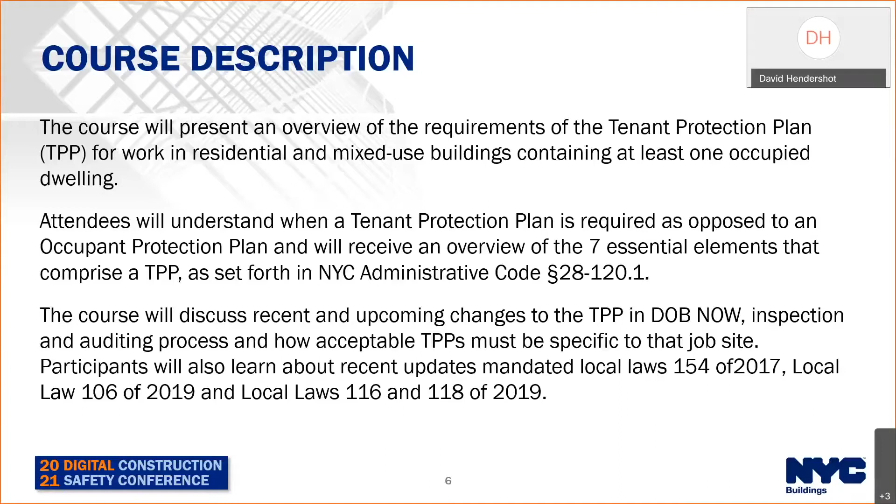28-120.1. The course will discuss recent and upcoming changes to the TPP in DOB Now, which is the online DOB filing system, inspections and auditing process, and how acceptable TPPs must be specific to that job site. You'll also learn about recent updates mandated under Local Law 154 of 2017, Local Law 106 of 2019, and Local Laws 116 and 118 of 2019.

The objectives of the course: you'll be able to explain what a tenant protection plan is required and when it's required, as opposed to an occupant protection plan. You'll be able to review the 7 essential elements that comprise a TPP and describe the level of detail and site specificity that's required for an acceptable TPP.

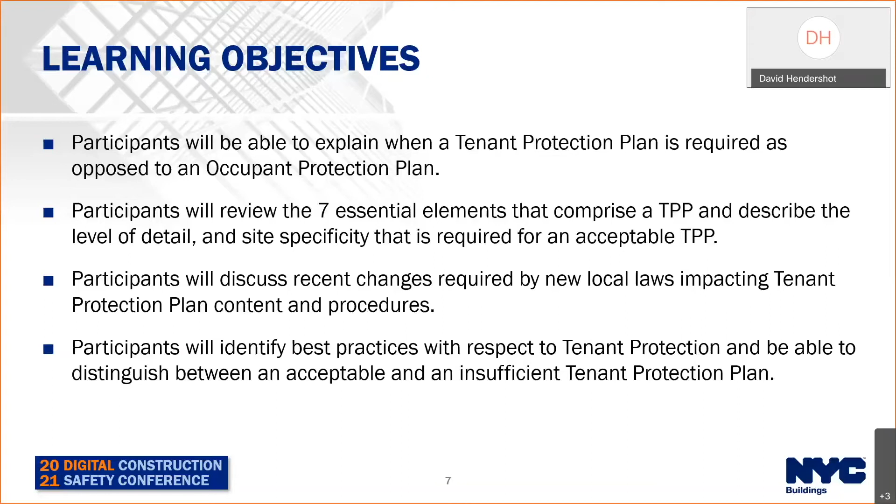Participants will discuss recent changes required by new local laws impacting tenant protection plan content and procedures, and you'll be able to identify best practices with respect to tenant protection and be able to distinguish between an acceptable and an insufficient tenant protection plan. I believe that brings us to Sarah's portion, so I'll sign off and we can pass over to her.

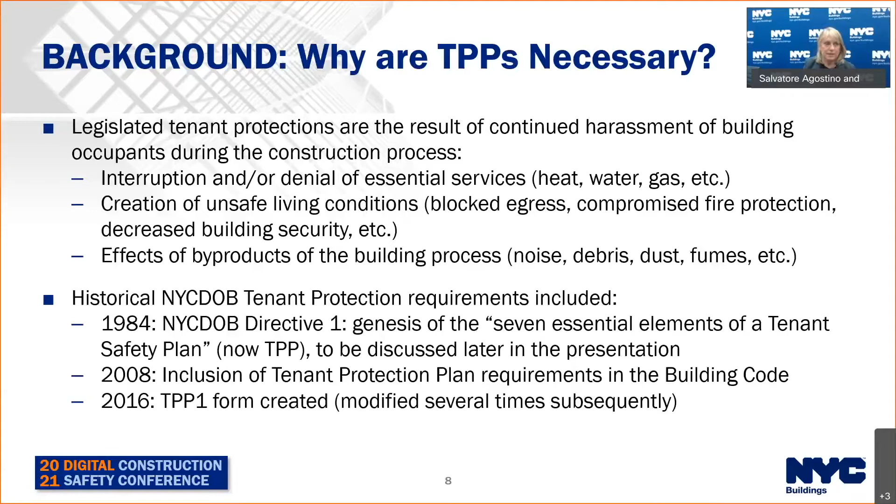So what you see here is an excerpt from the Directive 1 of 1984, which identified the 7 essential components of a tenant safety plan. You'll recognize them as similar to the 7 essential elements of the current tenant protection plan.

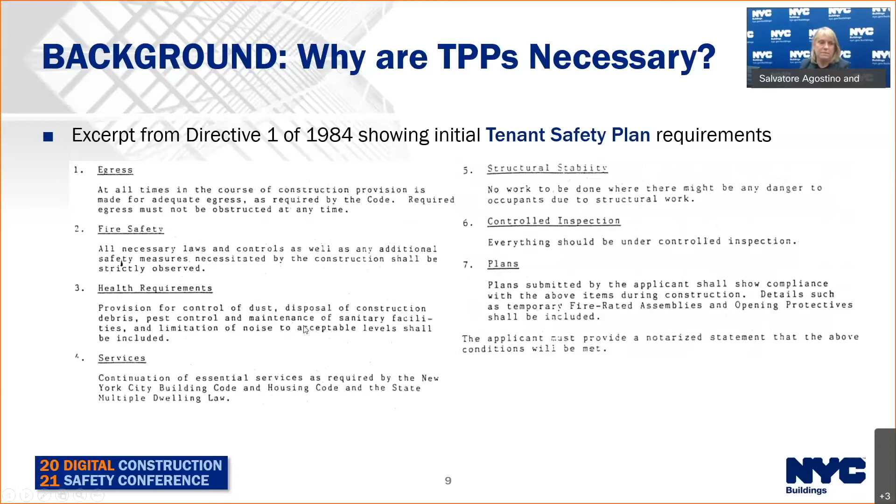So the next 3 slides we're going to show you will actually show actual photos that were taken during TPP compliance inspections that were taken by the Office of the Buildings Marshal Inspectors team. It's meant to illustrate to you why TPPs are necessary and why residential tenants need to be protected during construction.

So in the photo on your screen, you'll see this is an actual photo that was taken. You have flammable debris and garbage that's blocking the egress path. You have compromised fire rating on the right. That will necessitate temporary fire protection or a fire watch.

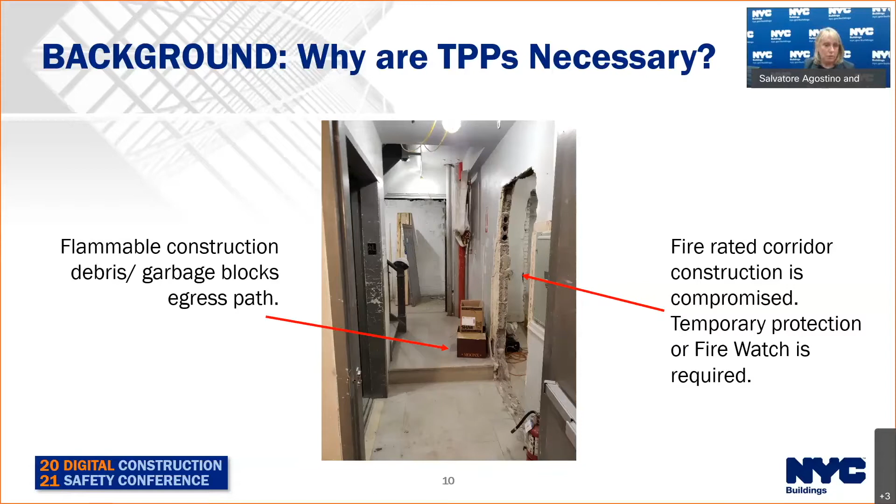In this photo, you can see an ineffective dust barrier that is barely being held up, that is not sealed, that does not keep the dust from penetrating the public areas of the building. You can see the misplaced exit sign to the right as well.

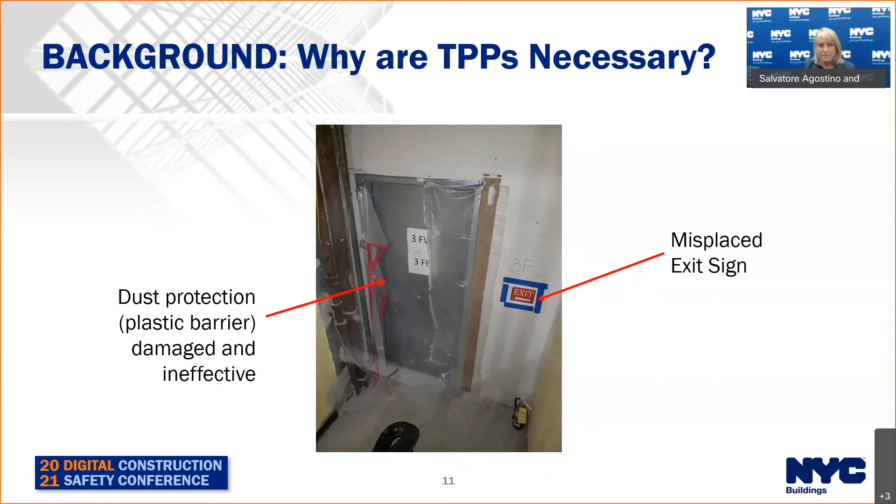And in this third photo, you can see a number of hazards, including the open wood joists that are presenting both a fire hazard and noise problems, the excessive debris that's been allowed to accumulate. And so it's worth noting that all three of these photos were taken in occupied buildings with obvious construction underway.

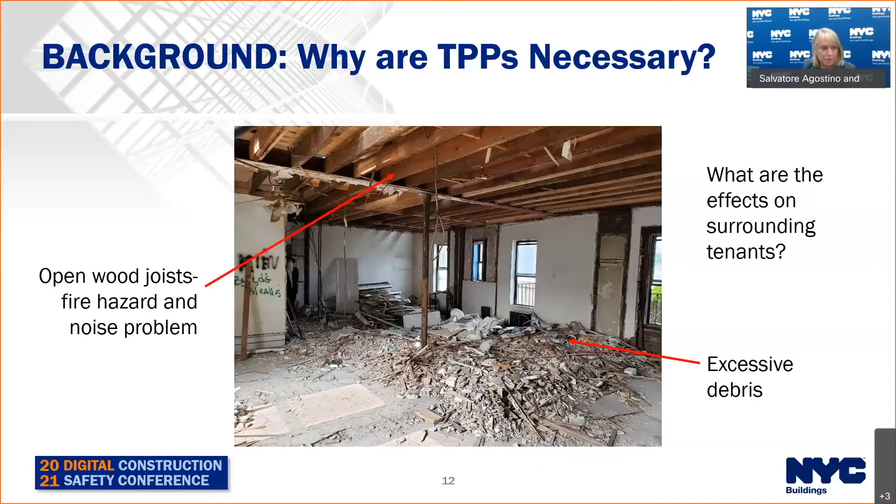So one of the most common questions that we receive is, when is a TPP required versus an occupant protection plan? The tenant protection plan is required when you have one or more dwelling unit that will be occupied at any point during construction, even if that construction is in a non-residential portion of the building.

An occupant protection plan, on the other hand, is prepared for a non-residential project. It's not filed with DOB, but it must be available on site. The presentation today will focus exclusively on TPPs. We will not cover OPPs. Here you can see the building code section 3303.10 that sets forth the requirements of the OPPs versus the TPPs.

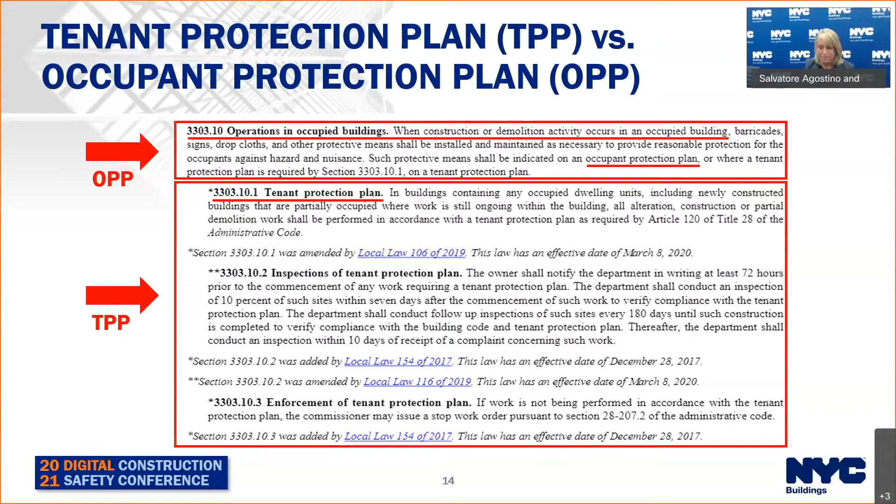Tenant protection plans have evolved due to the requirements of local laws over the past 4 years. Most notably, we have Local Law 154 of 2017, which reformed the TPP and set mandatory inspection requirements. Salvatore Agostino will discuss the TPP inspections later in his portion of the presentation.

Local Law 161 of 2017 created the Office of the Tenant Advocate. Local Law 106 of 2019 shifted the requirement to file the TPP to the RDP hired by the general contractor, and also increased the inspection mandate to 10%. Following that was Local Law 116 of 2019, which required that the TPP be submitted prior to permit, as opposed to prior to approval.

I'll discuss Local Law 116 a little bit further in the next slide. Finally, Local Law 118 of 2019 requires both the owner and applicant to sign the TPP, and it provides for increased penalties for failure to file a TPP — up to $10,000 for the first offense and $25,000 for subsequent offenses.

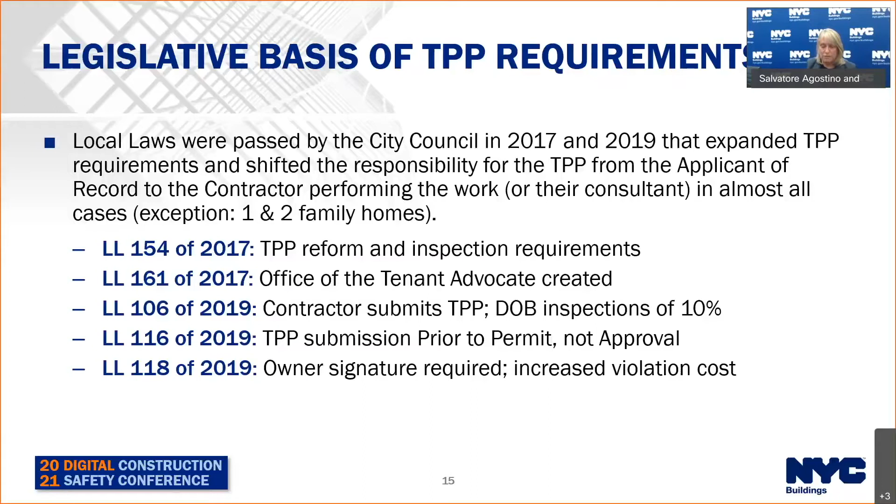Local Law 116 of 2019 moved the tenant protection plan to become a prior-to-permit requirement. For BIS jobs, this went effective as of November 10th, 2020. For DOB NOW filings, it was effective December 28th, 2020.

TPPs are not reviewed at submission, but are subject to random audit, with violations issued by the Office of the Buildings Marshal or other DOB enforcement units. The Office of the Tenant Advocate also recently launched a TPP audit team that performs audits on BIS jobs filed post November 9th, 2020, and for DOB NOW jobs filed after December 27th, 2020.

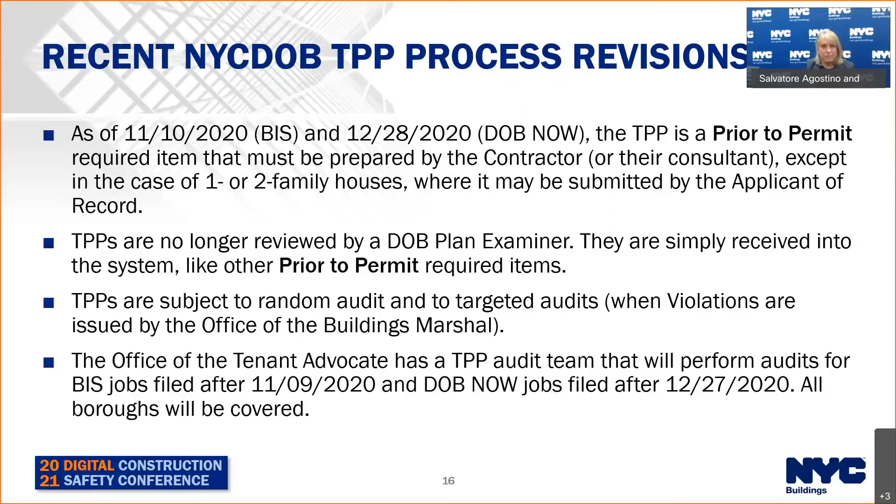If you have a job subject to an audit that was filed prior to those dates, it will be returned as before to the borough where it will be audited by the borough plan examiners. You should contact the respective borough plan examiner for guidance.

At this point, I'm going to turn the controls over to David Hendershot, who is the Assistant Chief Plan Examiner assigned to oversee the OTA tenant plan exam unit.

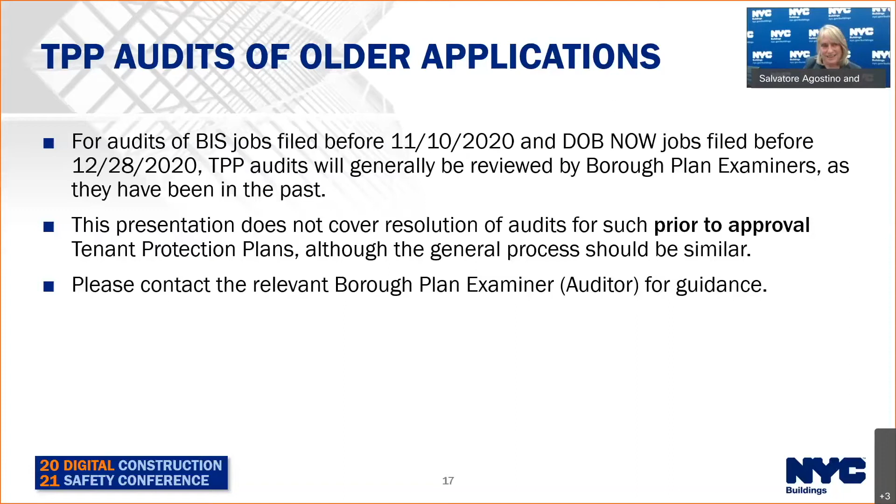Hi, everybody. Thanks, Sarah. I have a few preliminary thoughts about the whole process of changing from a prior-to-approval to a prior-to-permit item. That's a significant change because the TPP is no longer submitted by a representative of the owner, but rather a consultant of the contractor.

The fact that it was shifted to a prior-to-permit item allows the contractor and/or his consultant to really think about the job, think about the scope, create a plan of action — not only for construction, material ordering, and having crews on site, but also how they're going to protect the people who are still in the building while doing that project.

So it's become very important, and will be considered very important for any jobs that are audited, that the tenant protection plan be very detailed and site-specific to that particular job. With that said, I'm going to go through a fairly straightforward presentation of the 7 different elements of the tenant protection plan, and then provide some examples we've seen come through, with a few comments about those things, so it becomes clearer as we continue.

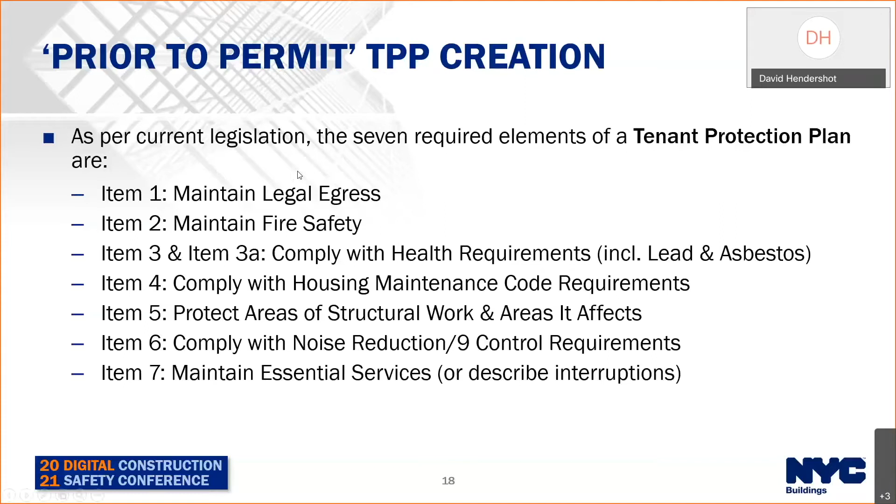So item number 1, maintaining egress — these are some examples of the things that will be looked for. You want to describe how it's going to be maintained. A lot of the audits we've conducted so far in the TPP audit unit have been relatively simple applications, like renovating an apartment, where egress wouldn't necessarily be affected to a great degree, other than making sure dust and debris don't get tracked through the hallways. Make sure you've got your dust barriers at the doors.

But the egress itself wouldn't usually be affected by one of those smaller projects. However, if you were doing multiple floors of a building and some of that work involved putting one of the stairs out of commission for a while because it required repair or railing replacement, then you would definitely want to describe in more detail how the egress is going to change.

We'll talk about it more later on. You probably also want to provide some diagrammatic floor plans to show how that egress is going to change. If any egress is going to be blocked, you have to describe the alternative egress routes. Your phased floor plans may be required. If any egress path is in the construction area, you need to describe how it's going to be protected, maintained, and cleaned.

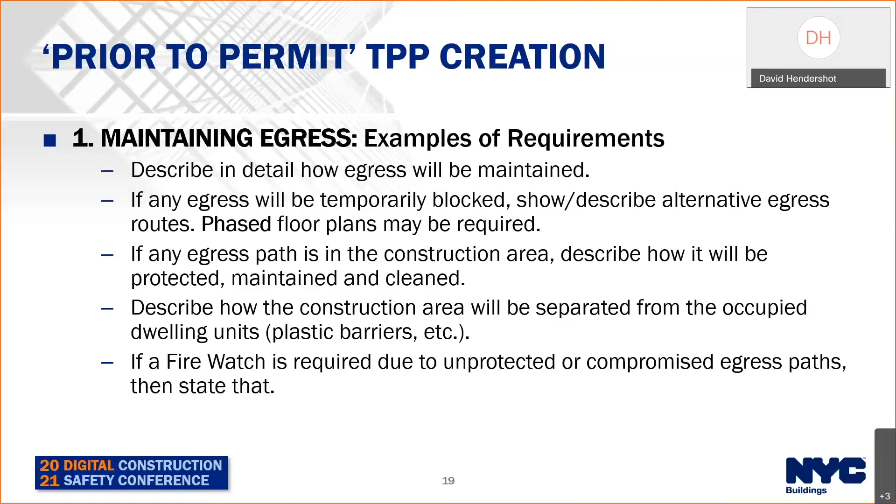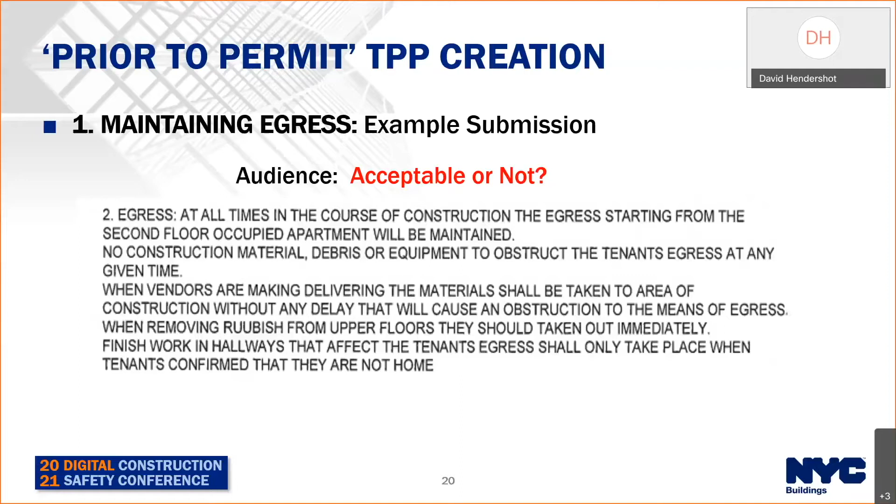The next item: maintaining fire protection. Again, harking back to Sarah's slides showing places where hallways have been demolished in part. There's also cases where pipe chases that are fire rated are being compromised during construction. Sometimes a stair enclosure might be modified, or floor and ceiling assemblies - again, remember looking back at Sarah's picture of that apartment renovation where all of the existing ceilings had been removed, leaving only the exposed wood joists.

I think that's a clear case where a fire watch would be required, in order to make sure that any small fire that might be caused, whether electrical in origin or otherwise, in that apartment that was under construction, had somebody there to notify anybody as needed before all that exposed wood caught fire.

Fire extinguishers are required on the site, so you should say that, say where they're going to be. If you have any related diagrams, show them.

Any sprinkler or standpipe system modifications should be described. Any service interruptions for those systems should be described. That would be in the separate service interruptions section.

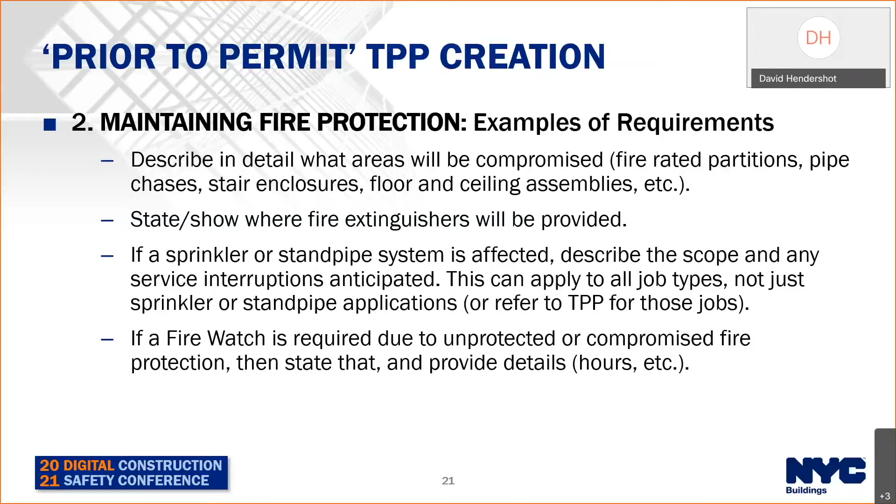Once again, if a fire watch is required due to unprotected or compromised fire protection, then please say that with details about it, when they're going to have to be there.

Here's an example of the fire safety submission. All precautions to be observed to maintain fire safety, as well as additional safety measures necessitated by the construction, shall be strictly observed. A 2-hour fire-rated wall and fireproof self-closing door to be erected in the hallway between the tenant's apartment and the area of work. In any event, any fireproofing material adjacent to the occupied apartment is being removed. A fire guard shall be present at all times while work is being done and the fireproofing material is being replaced.

Again, everybody feel free to add any comments in the chat as we go, or any questions that you might have. In general, I believe this one's fairly close to being a good example.

Going through the 3 sentences, the first one is clearly a little bit vague. All precautions to be observed is not really the kind of language that we would like to see, and that will satisfy these requirements.

This description of the fire-rated wall being put in place to protect the hallway is good, and that's a good example of what you should be looking for.

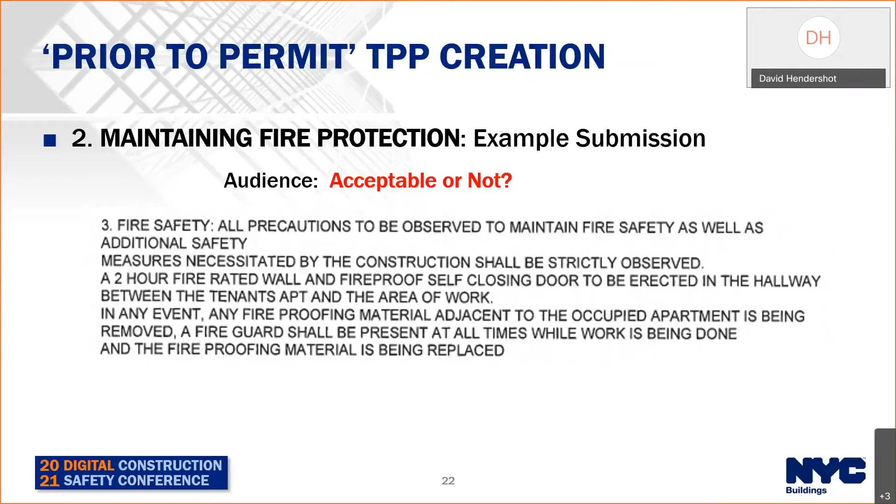The tenants themselves, of course, don't have access to the drawings that are being done for any particular job, nor would they necessarily be able to understand those drawings even if they were to have access to them. That's why these verbal narratives and simpler diagrams are important to provide for people to understand how they're going to be protected during the construction process. So please keep that in mind.

Item 3 and 3A, comply with health requirements. This is a big one for most people. I've experienced construction in the apartment below me. I'm sure that many of you are very familiar with the issues, both as a representative of a client and perhaps as somebody who's inspecting things in the field, et cetera.

So please be as specific as possible about how you're going to keep the dust and the debris and the fumes, et cetera, from getting out of the construction area, and state the results of the asbestos testing.

Many people don't realize that before you even file an application, you should have the asbestos testing already completed, because part of the application process is to indicate the control number for the DEP form that you obtain after having that inspection done, in certain cases, if it's exempt.

Also, if you do have asbestos, then please indicate any action that might need to be taken if additional material that hasn't been abated yet is encountered during construction. It's difficult to anticipate some of these things.

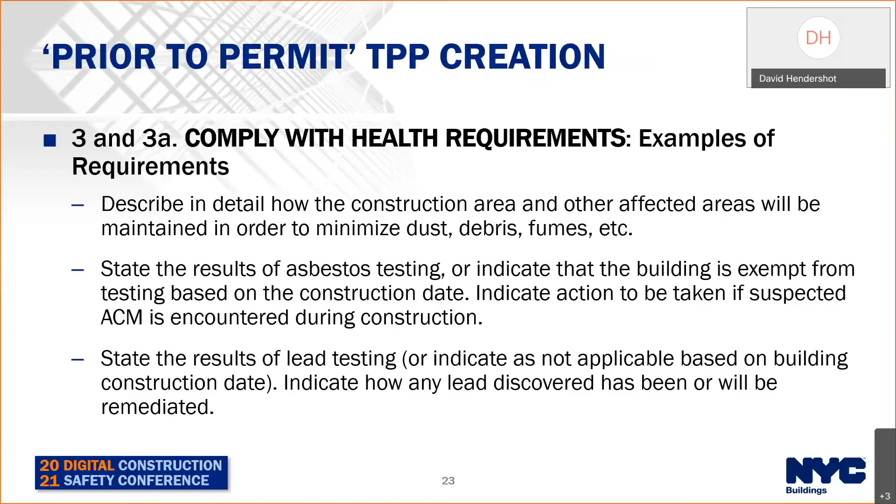State any lead testing results or indicate how any lead discovered has been or will be remediated. For buildings of more recent construction date, the lead in paint has been removed. But for any building built probably before the '68 code, you'll probably want to do your own due diligence on this.

Here's our example for the health requirements. All construction work shall be confined to the interior of the apartment, which will be unoccupied during construction. That's actually an important point. Sometimes people continue to live in their apartments while some work is being done—for example, a kitchen renovation where you eat takeout for a few months. But if that's the case, you need to identify it on the TPP, making sure people know the owners will be in residence.

At no time will construction block the hallway, other public spaces, basement, or means of egress. All construction-related matter will be confined to the work site. The apartment entrance will be protected by a zipper cover at all times and kept clean. A sticky mat will be placed at the apartment entrance. An air scrubber with HEPA filters will be on during all working hours. Public hallways will be vacuumed with a HEPA filter vacuum, mopped with a wet mop after each material removal, and at the end of the workday at 3:30 p.m., or at any other time during construction as needed.

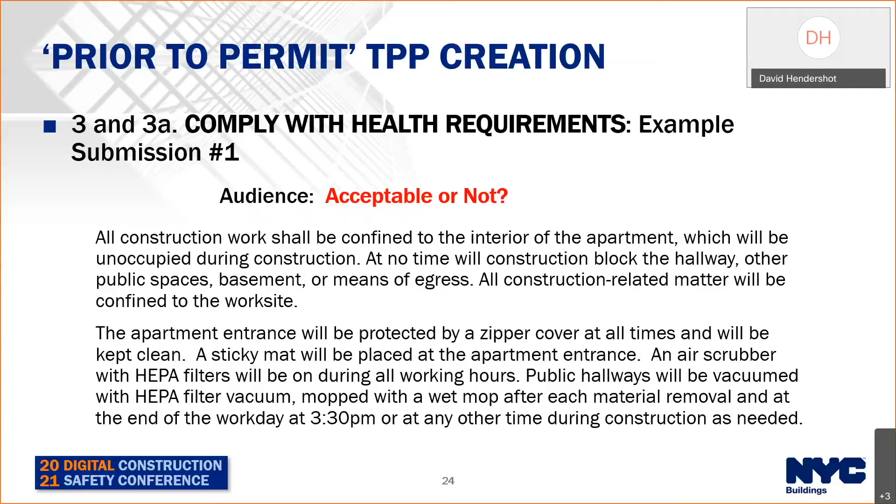I think this is a pretty good example of health requirements, except for the fact that they forgot asbestos and lead. They would need to include some indication of those two elements in order to make this acceptable. Otherwise, for a relatively simple job, this seems fairly comprehensive.

This is actually perhaps a continuation of what we saw before—I'm sorry, this is the second example. Health requirements: dust to be confined, kept to a minimum, and removed after completion of work each day. Plastic covers shall be placed on apartment entry doors where work being done may cause excessive dust. Disposal of construction debris must be done in a safe manner. Construction noise will cease after normal working hours, limited to acceptable levels. Maintain sanitary facilities and control pests at all times.

Number 5 says the contractor must comply with applicable laws relating to lead and asbestos—if observed, immediately contact owner or architect. I think you can tell this one is deficient in terms of number 5, lead and asbestos again. At that point in the process, the contractor should know whether there is asbestos, whether there's an ACP5 form saying asbestos is not present, or an ACP21 saying the material has already been abated before construction starts. And it's advisable to say what will happen if additional materials are discovered on site after construction has begun.

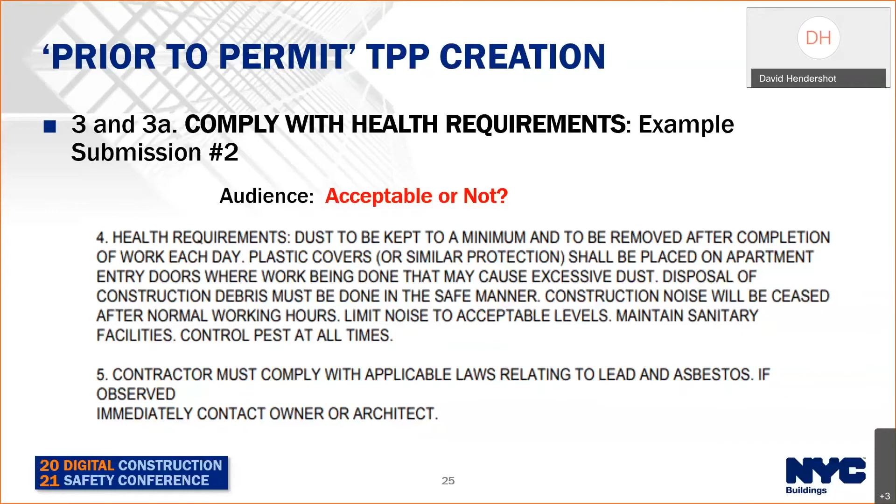There was a little bit of cross-pollination in that last one as well, where they mentioned things that weren't necessarily relevant to that particular part of the TPP, and we'll talk about that a little bit more.

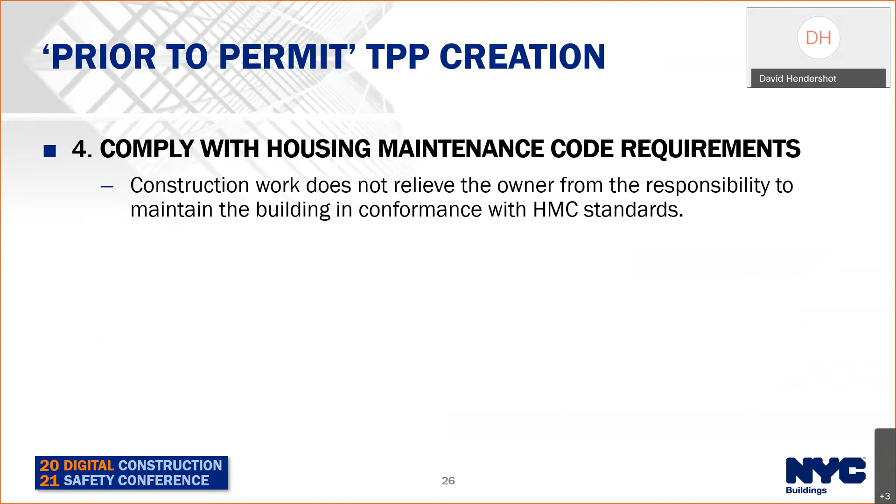The fourth item is to comply with the housing maintenance code requirements. Just because the building's under construction doesn't mean the owner can be slack about keeping the building clean and safe for all residents. In this example, construction is limited to the interior of the apartment, which will be unoccupied during construction. All building and sanitary services will be maintained throughout construction, with limited disruption of water service for a 4-hour period described in number 7. The water shutoff will be performed by a licensed plumber. Tenants will receive 72-hour written notice prior to the shutoff and will be provided drinking water on request.

Measures to control dust dispersal are set forth below, as well as compliance with health requirements. Work will only occur between the hours of 9 a.m. and 4 p.m. by a licensed contractor. In this example, there's a lot of detailed information provided, but not a lot of it really belongs in this section.

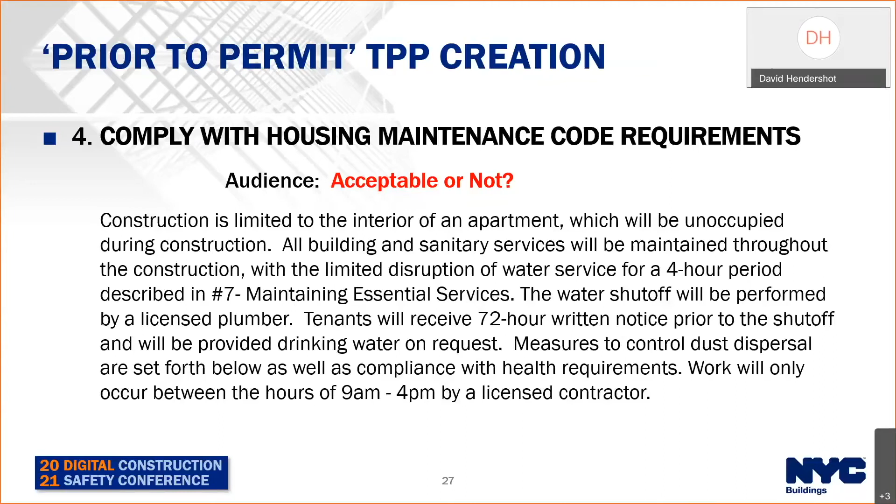We're not counting words when it comes to a tenant protection plan. We're evaluating the scope and the provisions being provided for people to meet the requirements. So it's not necessary to repeat information from one section into another. You can familiarize yourself with the housing maintenance code and put in any applicable sections, and that's it.

Complying with the structural work limitations: if no structural work is proposed, then simply state that. If there's any structural work proposed, describe in detail how the tenants will be protected during such work. This is required even if the structural work is being done under a separate filing. If acceptable, refer in writing to the separate tenant protection plan for separate filings, and include that job number as well.

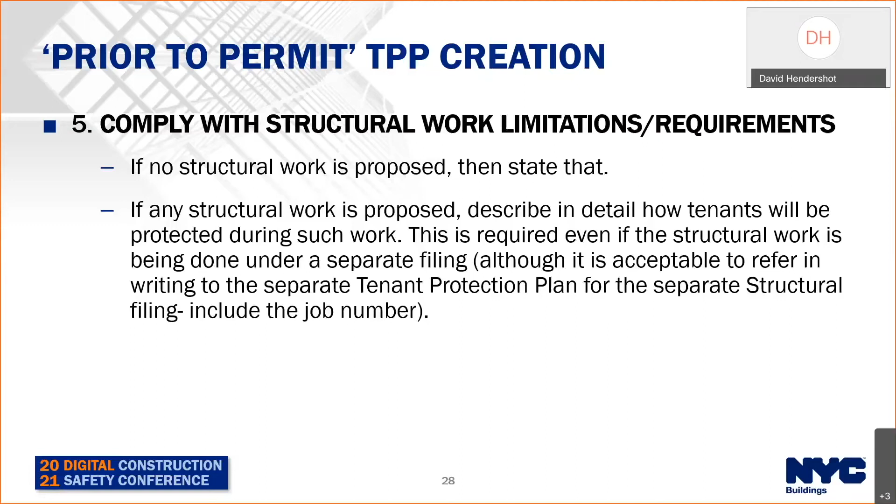Our example for number 5 simply says no structural work shall be done that may endanger the occupants. The flaw in that statement is simply that it doesn't say whether or not there's any structural work being done—it only says we're not going to endanger the occupants. So please, state whether or not structural work is going to be done, and if it is, provide information as necessary to confirm that the tenants will be protected during that work.

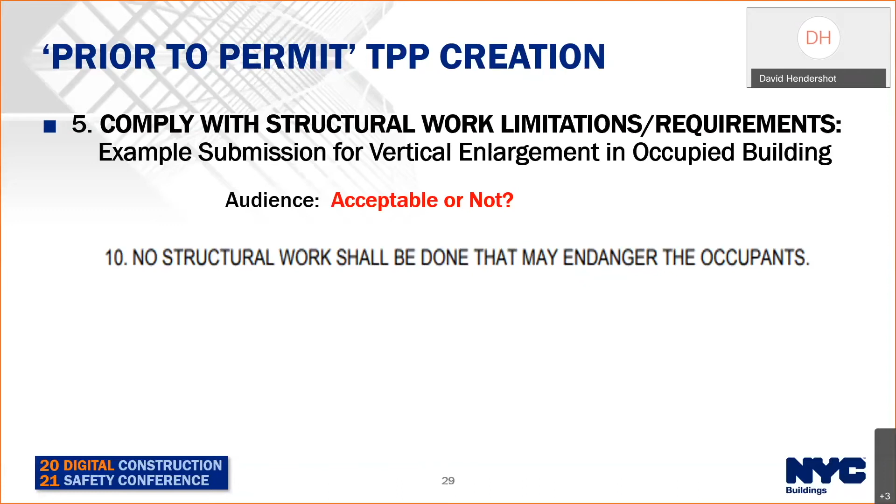Another big issue during construction, as we all know, is noise. There is a separate noise mitigation plan required to be submitted to NYC Department of Environmental Protection, and you're required to maintain a copy of that document on the site. So for the TPP, you can simply refer to the noise mitigation plan in writing, or if you prefer, describe its contents. But often it'll be easier simply to refer to it and make sure people know it will be made available for tenant review.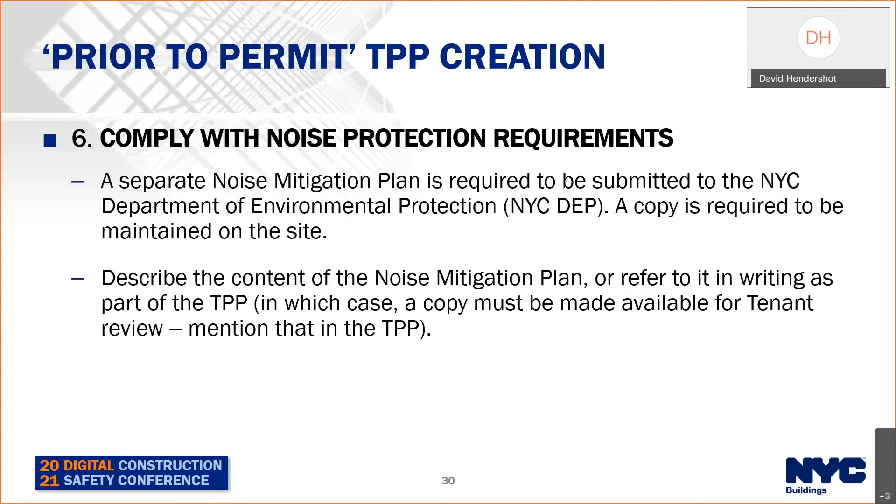The last item, number 7, another extremely important one. We can move back a couple of slides that I missed. There's the example, but also this is just an excerpt from the DEP website showing that you can simply go online to submit the noise mitigation plan, and it also provides a link to the New York City Noise Code to show what those requirements are and how your construction project might affect those.

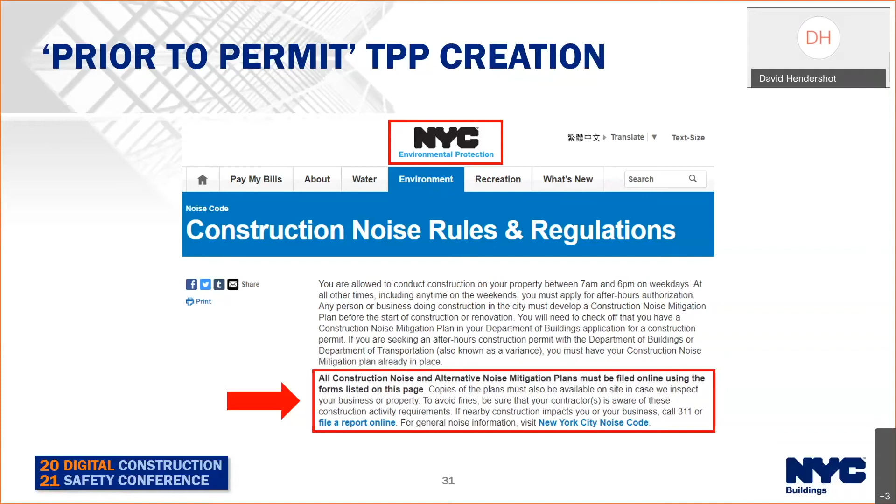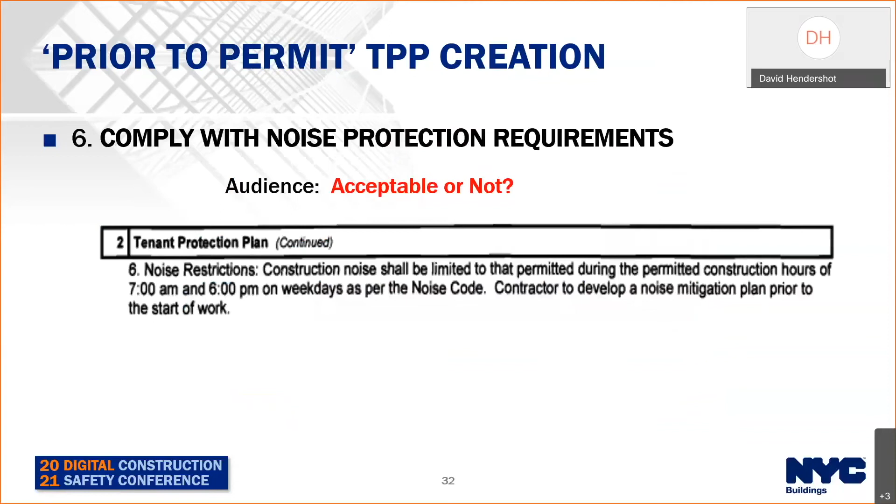The example for this one: construction noise shall be limited to that permitted during the permitted construction hours of 7 a.m. and 6 p.m. on weekdays as per the noise code. Contractor to develop a noise mitigation plan prior to the start of the work. So I think this is generally acceptable.

Describe essential service interruptions. This is another important one. Almost all applications require some interruption of essential services such as water, electricity, and gas. Elevator service is also considered essential for accessibility reasons, although elevators are typically filed separately.

Describe all anticipated essential service interruptions. What kind of interruption is it going to be? How many interruptions? How long is it going to be? Notify the tenants and other affected parties, and describe any sufficient alternatives to be provided. If your water supply is going to be out for 3 days, then what are people going to do about water? If their heat's going to be off for a month?

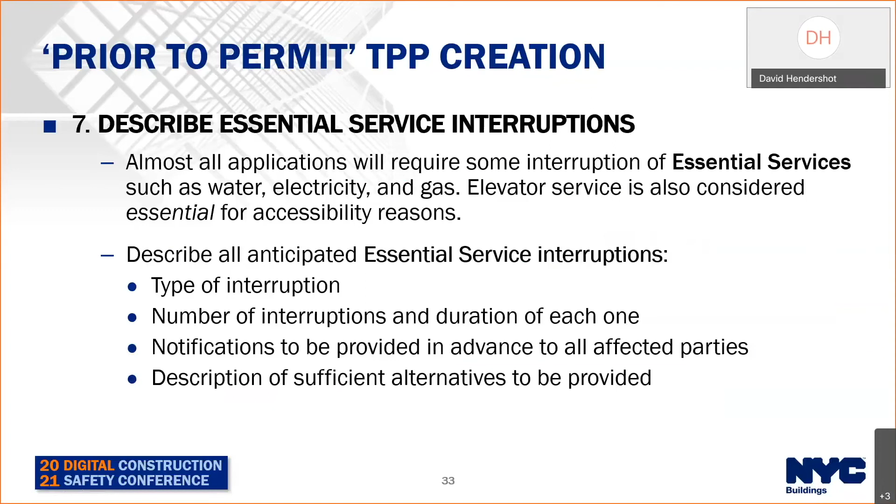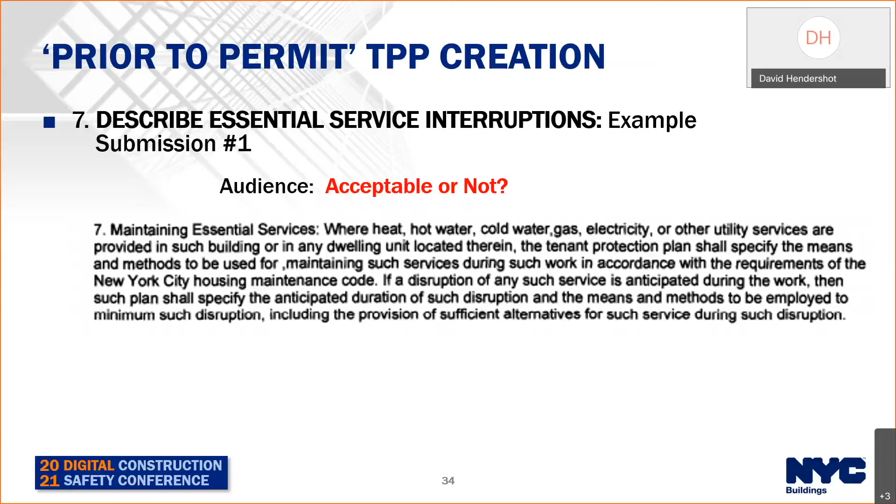In our first example: where heat, hot water, cold water, gas, electricity, and other utility services are provided in such building or in any dwelling unit located therein, the tenant protection plan shall specify the means and methods, and so on. You can tell that this one is simply repeating some of the requirements given in the administrative code or in a service notice or some other outside source, but it's not actually providing an example of what's going to happen on this particular job. It needs to be specific, as mentioned before.

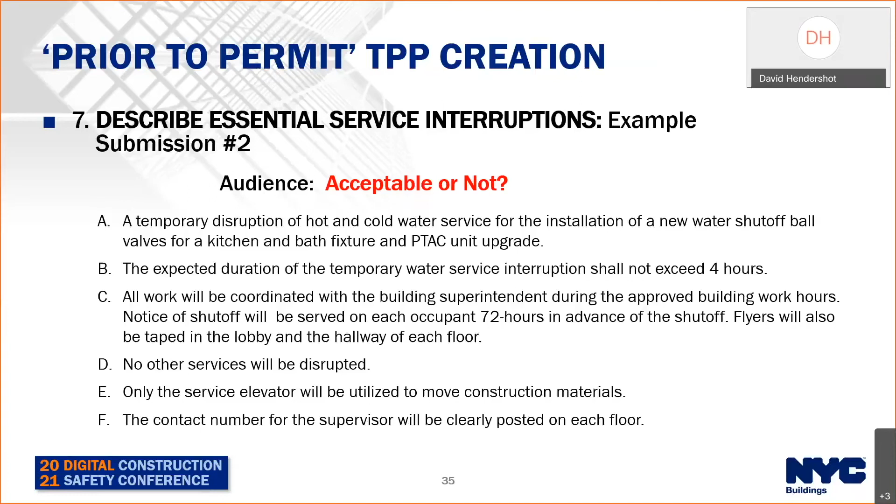Here's an example of one that is fairly comprehensive and reasonable: temporary disruption of hot and cold water services for the installation of a new water shutoff ball valve for a kitchen and bath fixture and PTAC unit upgrade. Expected duration of the temporary water service shall not exceed 4 hours. Work coordinated with the building superintendent. 72-hour notice to the tenants. Flyers will be taped in the lobby and hallways. No other services will be disrupted. Only the service elevator will be used to move construction material, so they're not anticipating any passenger elevator interruptions. And the contact number for the super will be clearly posted on each floor.

So some tenant protection plan takeaways: make sure that it's detailed, make sure that it's site specific. Don't use generic terms such as code compliant, protected in accordance with law, legal, approved, etc. And make sure that you address all seven elements, even if they don't apply to your job—and perhaps especially if they don't apply to your job, you need to say that.

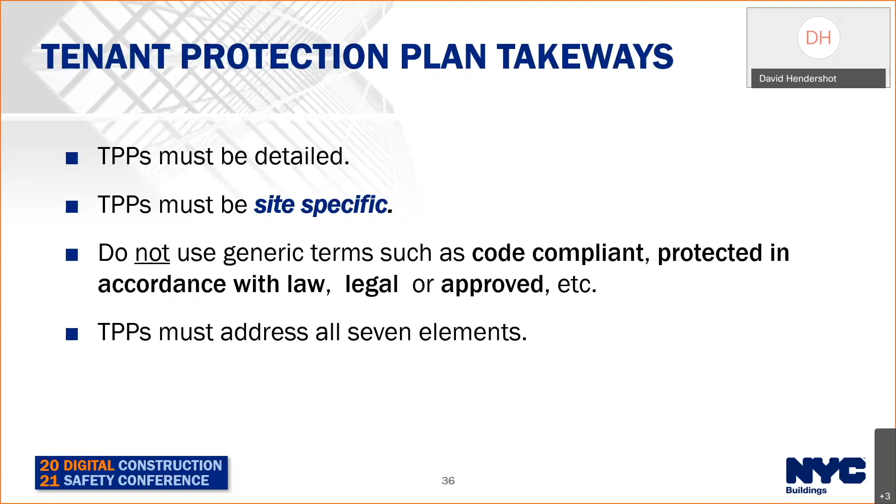As I mentioned before, in some cases, buildings are granted partial occupancy for dwelling units while construction is completed elsewhere in the building. Oftentimes you'll see mixed-use buildings where there's work on the commercial spaces while people are still living in the building. Building Code Section 3303.10.1 requires you to put a TPP in place as soon as any dwelling units are occupied in a building still undergoing construction, even if construction isn't occurring in the residential portions.

Submit that to DOB now. As Sarah mentioned before, the TPP is not something that's being reviewed by plan examiners anymore, but it's still required to be provided to the DOB for record and potential audit in case there's any violation or stop work order. Sometimes there might just be a random audit on certain jobs.

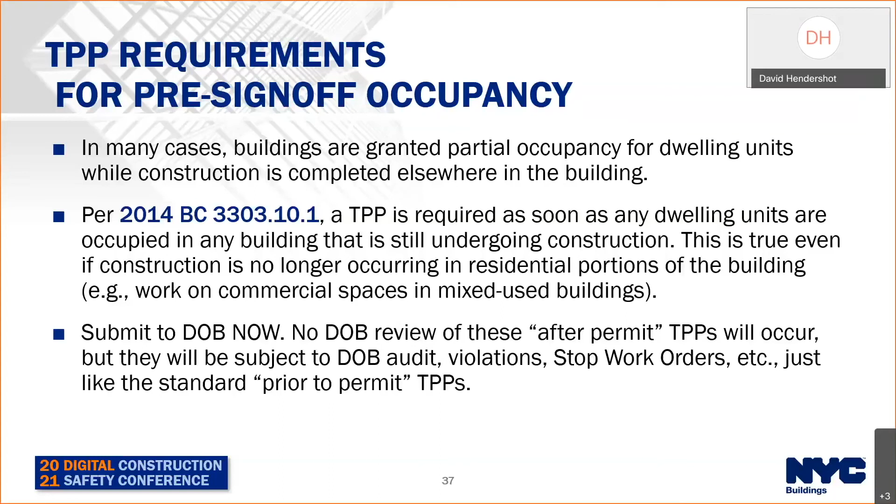A big question that comes up very often is whether or not any kind of floor plan is required for a tenant protection plan, and it can only be said that it's up to the professional judgment of the person submitting it. Simpler jobs can usually be handled with a narrative. More complicated work scopes with multiple phases or actual interruptions of egress paths for certain periods of time will definitely need a floor plan in order to explain how the egress is being rerouted.

If you're blocking or closing a means of egress, the plans have to show that modified egress plan and temporary signage to redirect tenants to the modified paths. Phased construction plans show the varying egress paths, signage, etc., as each phase is undertaken. The contractor and consultant are responsible for determining whether or not floor plans are necessary, subject to audit.

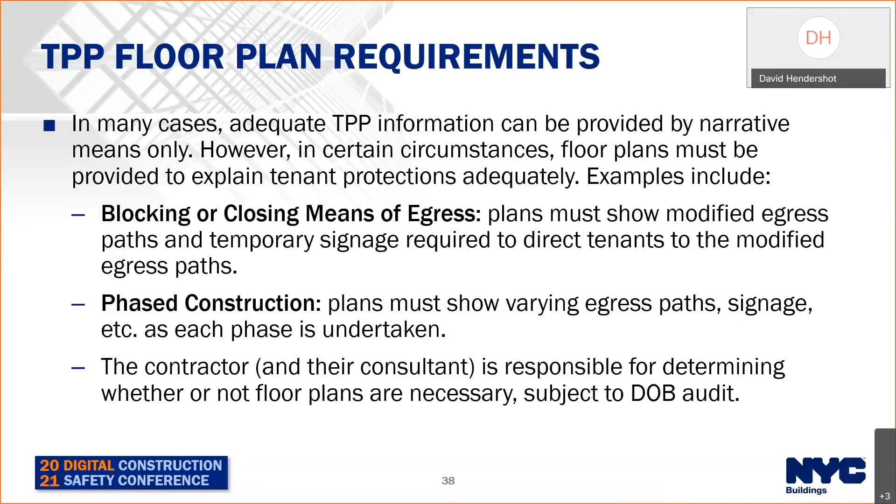If the situation in the field changes somehow—if you end up having to interrupt services you didn't think you were going to have to interrupt, or some structural issue comes up—you need to amend the tenant protection plan to show those additional elements, at the same time as the work is going to be done, preferably before. Amendments to prior-to-permit TPPs aren't going to be reviewed by the DOB, but they must be submitted for record and possible audit. Amended TPPs have to be available on site as soon as they're necessary to reflect actual site conditions.

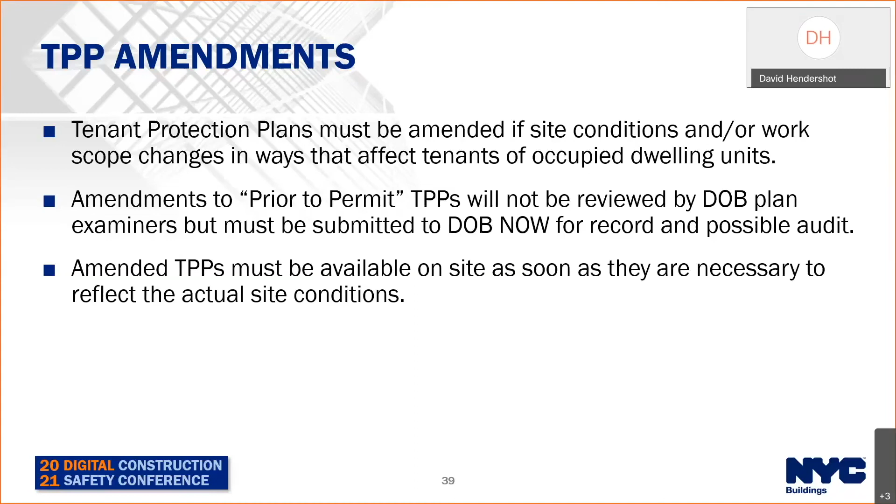Thank you, David. I'll take you through the rest of the presentation and discuss enforcement of tenant protection plans. There are several new initiatives, many coming into play since 2017, and the 2019 local law packages for tenant protection. One of the most significant is the requirement for notice within 72 hours of commencement of work.

The contractor must notify DOB. There is a portal that a contractor or owner can use to notify us. Failure to notify will result in a violation. It does not result in an immediate stop work order, but it is a violation. So notifications and failures to notify are always undergoing random audits.

Posting of the TPP inside the building—it must be available and posted upon the request of the tenant. The TPP notice must be posted at all times, in a reasonable area at a reasonable height so tenants can read it, and distributed to the tenants. It can be distributed various ways. We've seen it distributed via email with receipts in case there's a question about it, distributed by mail, or slid underneath the tenant's doors.

But you must keep a record of how it is distributed, because if it is called into question, you should be able to show the department and OATH court how you were able to distribute it, and that you actually did that.

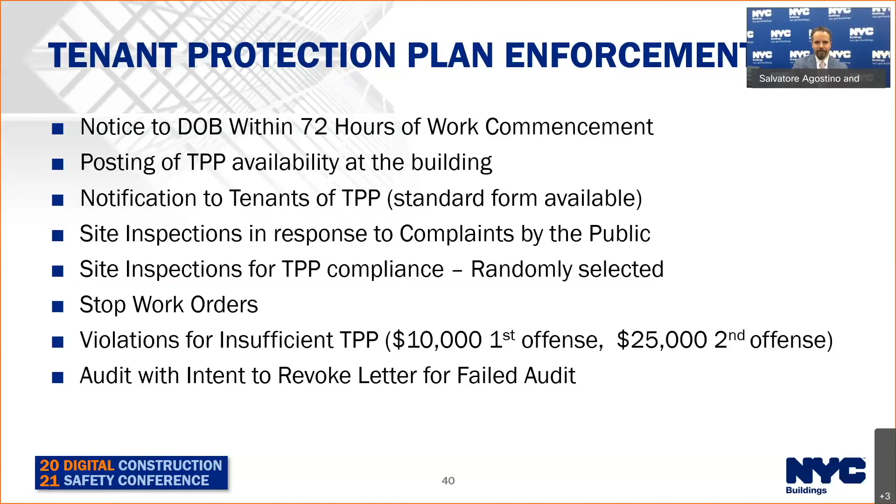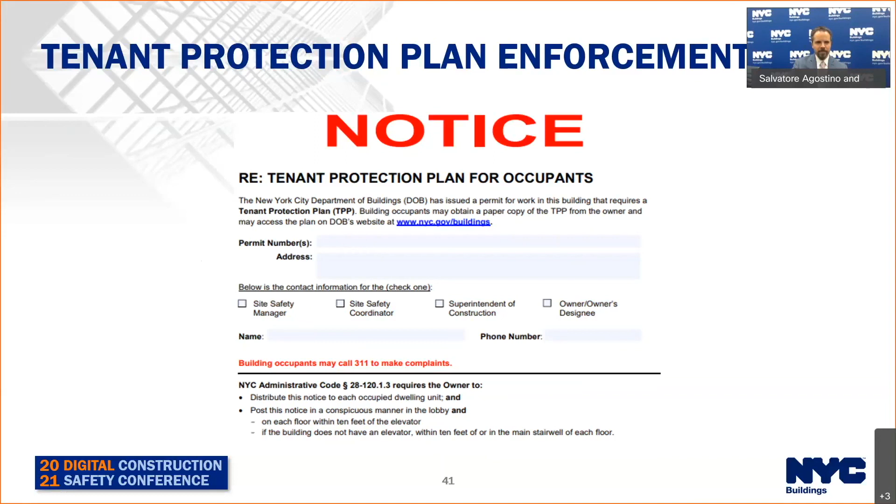And this is the sample TPP notice. Again, use this form. It's been on our website for the last 4 years. If you use this, as well as the Safe Construction Bill of Rights standard forms, it will help you get through the process.

The Real-Time Enforcement Unit was Local Law 188 of 2017. This unit monitors occupied buildings for construction work of 10% or more of the floor area. They inspect immediately hazardous complaints for work without a permit within 12 hours. DOB has created a notification form which will allow owners to send us that notification when conducting that work.

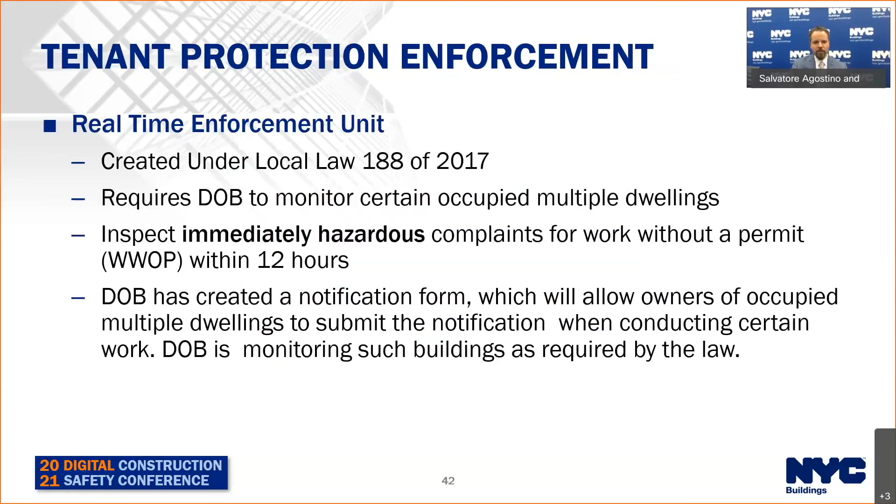The Safe Construction Bill of Rights, which we mentioned before, is actually part of the Housing Maintenance Code, although both DOB and HPD enforce this requirement. The Bill of Rights must include several factors, and there have been questions in the chat box about whether the Bill of Rights and the TPP notice are redundant since they share some of the same items. Yes, they do, and that's purposefully done. The idea between the two is to educate tenants about the work that's going on, how long it will go on, who's doing the work, and who to call if something's going wrong. There are two separate and distinct forms for this, and they each cover different areas. There is overlap, but they do cover separate areas. You have to have both of them posted and distributed.

The Bill of Rights has to include a description of the work being conducted and the specific location — meaning floor, unit, or common area. It has to be specific. It can't just say 'second floor.' If it's the entire second floor, it should say entire second floor. If it's only one unit or a common space on the second floor, you have to indicate that.

It has to indicate the hours of construction work. If the hours of work or any of the items change, you have to go back and change the Bill of Rights. You can't leave it as the initial draft from a couple months ago once you've amended the job, site conditions have changed, other issues have come up, or damage occurred during construction that now has to be addressed. If the location, type, or scope of work changes, you need to go back and amend all of these forms as well.

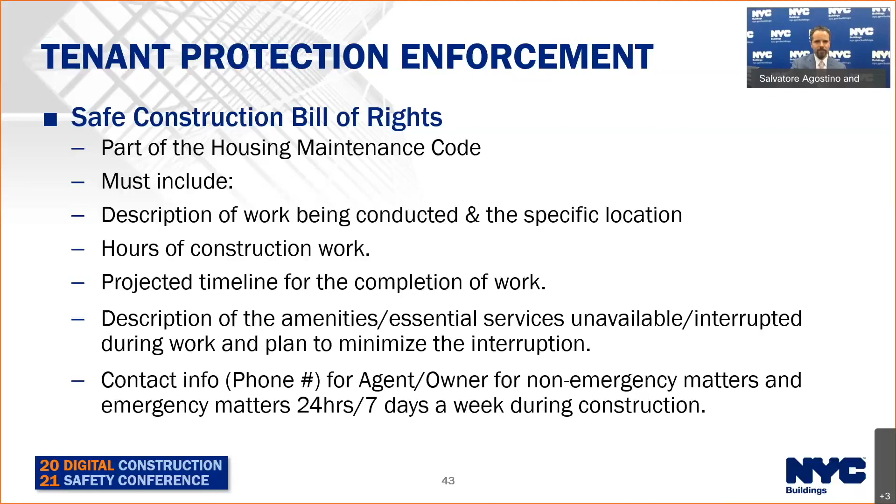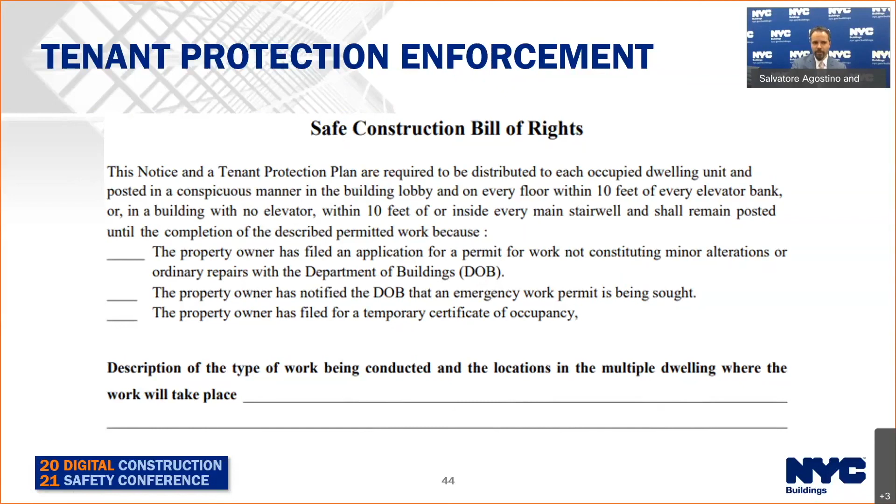This is a sample of the Safe Construction Bill of Rights. Use this form, do not create your own. Use the standard template — it allows our inspectors and tenants to recognize it, and anyone looking for it can find this standard form on our website and HPD's website. It lists everything you need; you can fill in the blanks so you don't leave anything out. If you create your own form, you will inevitably lose or leave something out, creating an issue for no reason. If you use our standard forms for both of these items, you'll be much better off.

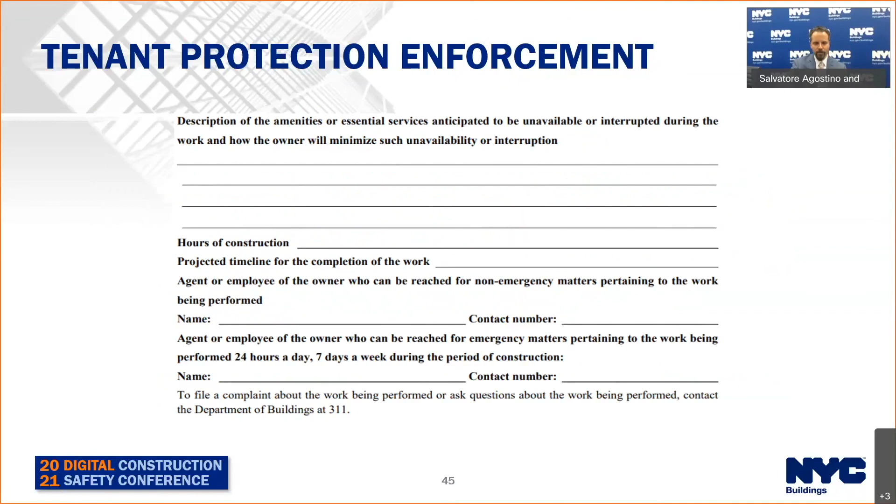It's also available, the notice, in different languages, telling tenants who to call and what the notice is supposed to contain.